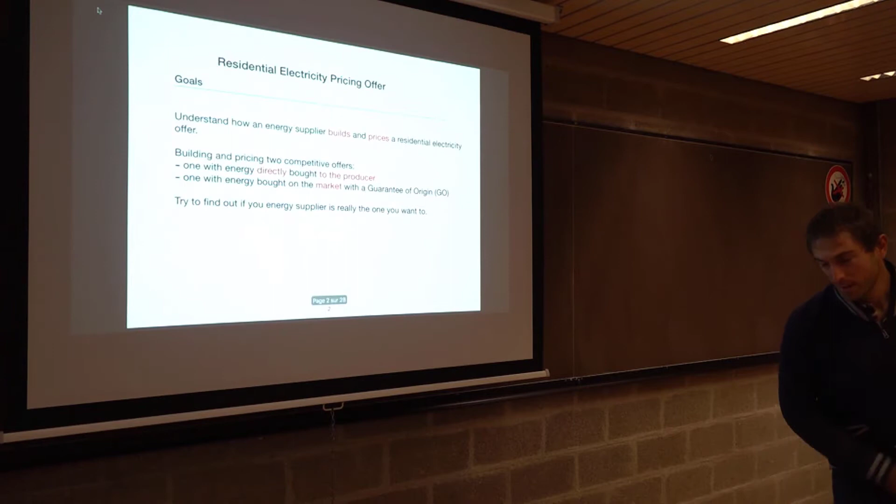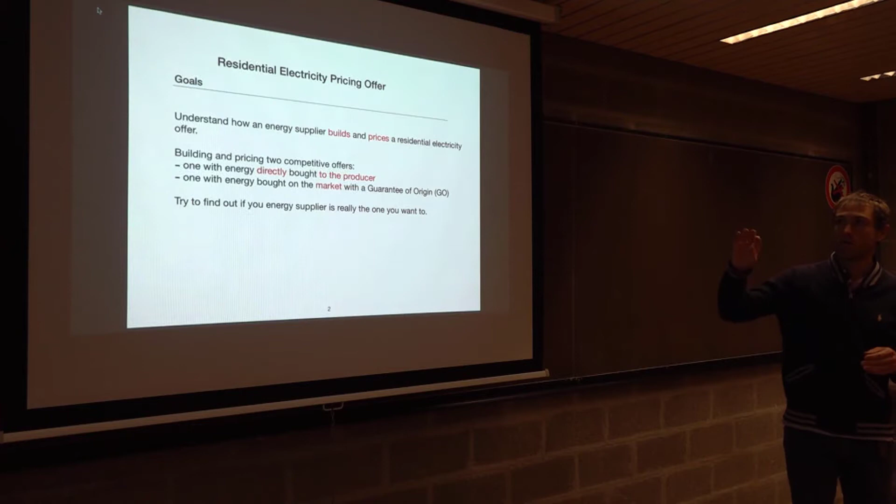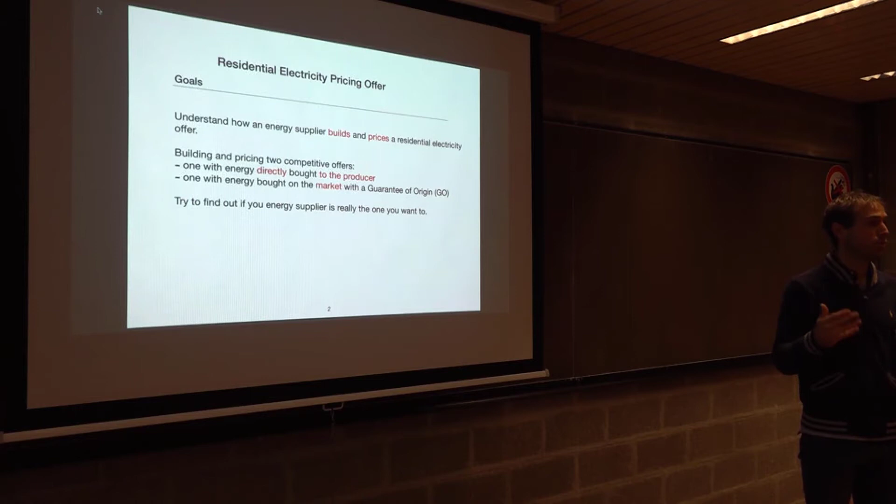So the goal of this part now is to understand how an energy supplier builds and prices a residential electricity offer. We will look at two ways of doing that. The first way is to buy the energy directly from the producer, and the second way is to buy the energy on the market with a guarantee of origin. These are two different ways of building an energy offer, but also two different ways of pricing it.

Remember, we have the producer. They produce electricity or gas. It goes to the grid, so you have the TSO and DSO. They transport and distribute the energy to our houses. And then, as a residential consumer, we can consume the electricity and the gas.

So when I have my electricity bill or my gas bill, I pay around 20% or 30% of the price just for the energy. The other 70% is for taxes, distribution and transportation. So I am not talking about taxes, distribution and transportation. I am only focusing on the energy part, that 20% to 30% of the electricity or gas bill.

So for this energy part, what do you have inside of it? Inside that 20%, you have of course energy, but also what is named balancing fees, the guarantee of origin, and also a thing that is named capacity. We'll talk about that at the end.

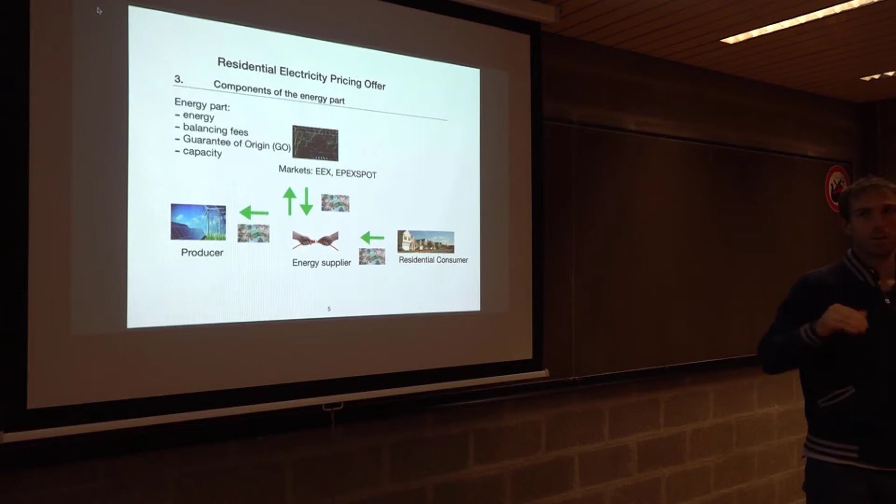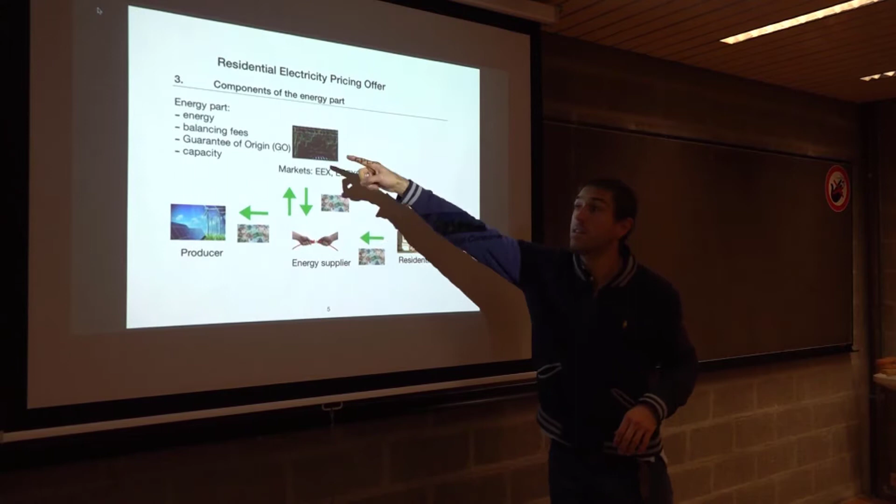So, I am an energy supplier. I can buy the energy on the market, or I can buy it directly from the producer. Imagine I mix it, and then I can sell my energy to the residential consumer. As an energy supplier, I will have to pay for the energy part, because I have to pay for the energy I am buying. But I will also have some balancing fee. If I want to make a green offer, I need to buy guarantee of origin. And I have also something to pay that is named capacity. So we will see each part of it.

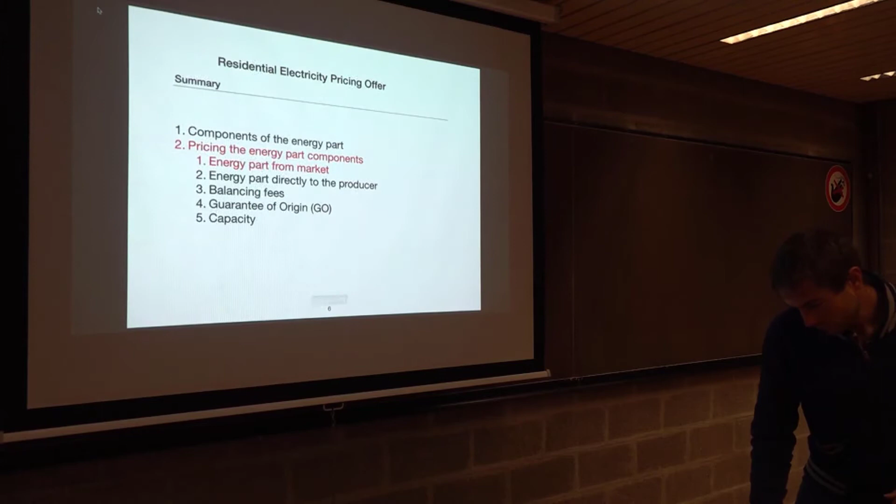So imagine that we are in a situation where we buy the energy on the market. I am focusing on the energy markets. You have different products on this energy market: calendars, quarters, months, weeks, days products. So you can buy electricity or gas in advance. For instance, 3 years before you will deliver electricity, you can buy it.

So in 3 years, you will deliver electricity in 3 years, but you can buy it 3 years before. Or a quarter before, or a month before, or a week before, or a day before. And then you can buy electricity or gas on a day-ahead basis. So for instance, we are here this morning, and tomorrow I have my consumer that will consume energy, and I would like to buy some energy for them.

So I can go to the day-ahead market, also named sometimes the spot market. Now imagine we are today, and my consumer is consuming energy in 2 hours, in 3 hours. I can also go to the intraday market and buy energy just 1 hour before, or 15 minutes before. So you have a lot of possibilities.

If you want to go to the market, you can buy energy from 3 years before up to 15 minutes before delivery. And you have several different products, and you can mix everything, do whatever you want, optimize, and at the end you have a fixed price. So this is what we will see.

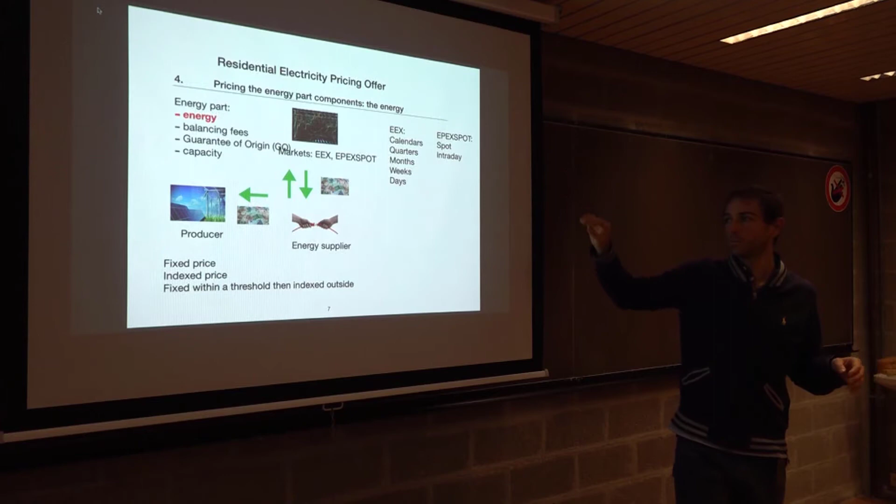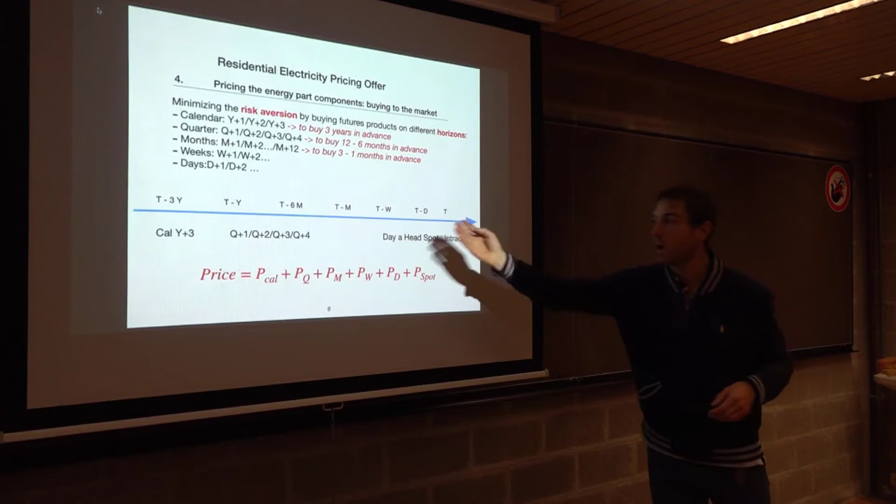So the resulting price of the energy offer will be a kind of mix of everything, because you can buy calendar, quarter, month, week, day, spot, and intraday, but imagine you have to deliver 10 megawatts of electricity for a given day.

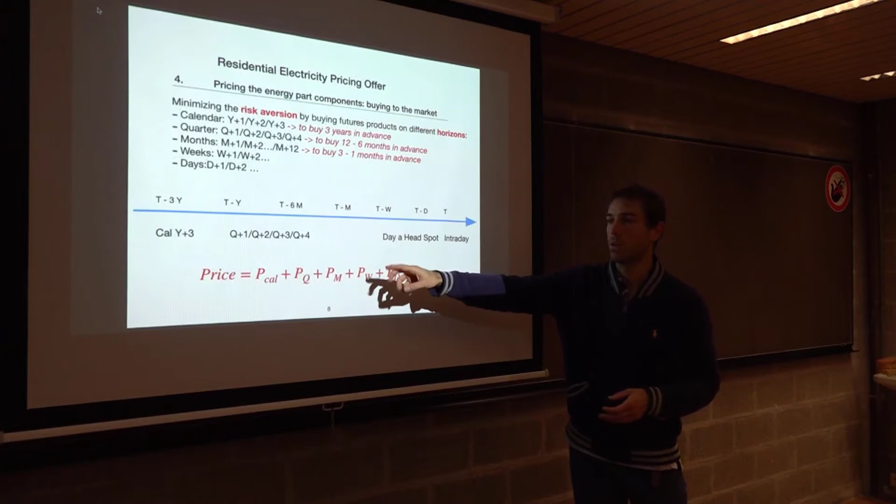You can buy 1 megawatt 3 years in advance, 1 megawatt 2 months in advance, 5 megawatts 3 weeks in advance, 1 megawatt 1 day in advance, and the last megawatt just the day before. The resulting price will be a kind of average of the different prices, because the price when you buy a calendar product is not necessarily the same as the month product, the weekly product, the day product, or the spot day-ahead product.

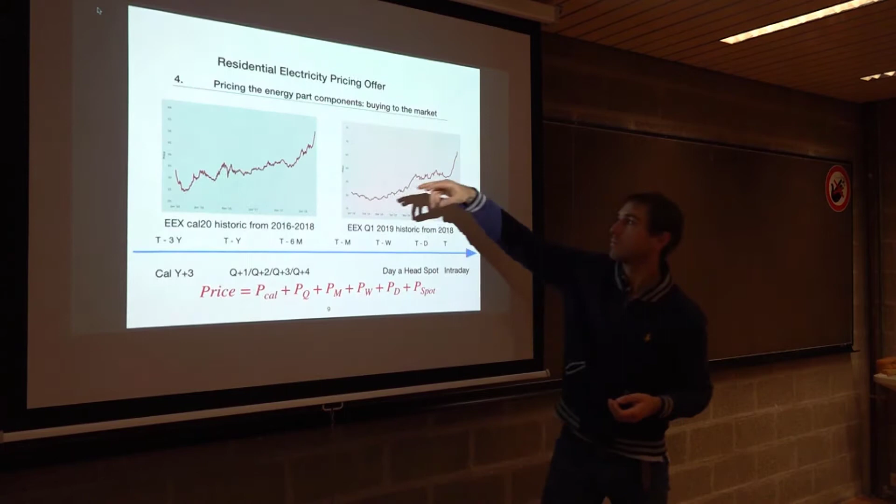And you see that its price is fluctuating—it's offer and demand. So for each product, calendar, quarter, month, weekly, day, it is fluctuating. It means that if you want to buy energy 3 years before, maybe one day it will be a given price, and the day after it will be another price. So you have to compose with that. When you are an energy supplier and want to buy energy in advance, you have to take into account that the prices of each product are fluctuating.

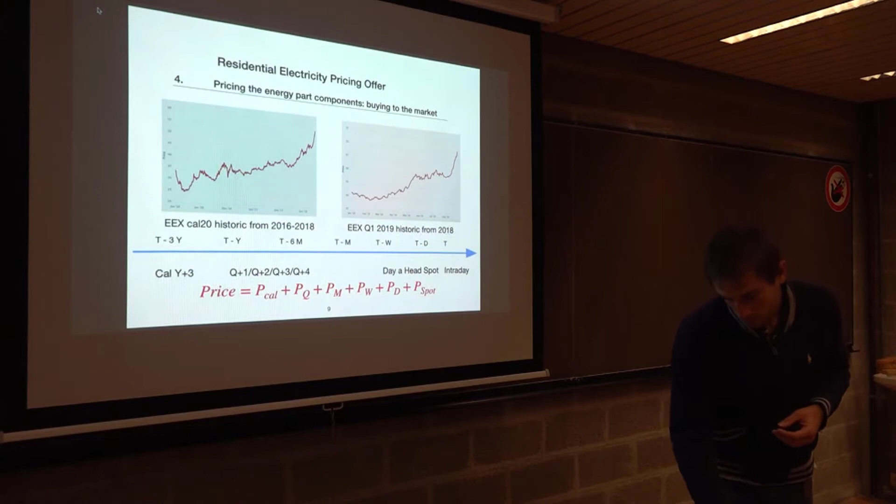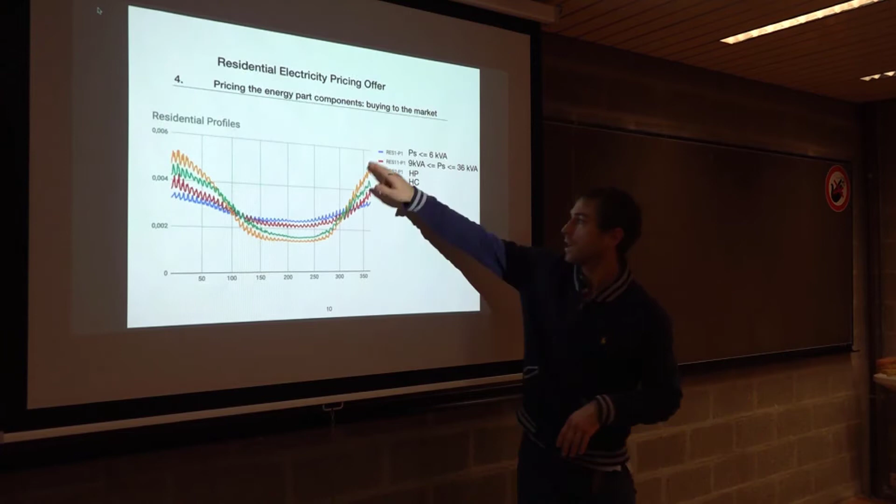So now, how can we do that? Imagine you have your consumers—you have several types of profiles, called residential profiles. Some profiles of consumers, here in winter and here in summer, consume much more during winter than other kinds of people.

For instance, these are big houses—big houses you have to heat a lot. In comparison, apartments, which are smaller and closer to each other, don't need as much heat. Most of the time during winter they need less heat.

So you have different kinds of residential profiles, and you try to identify among all your consumers which class of residential profile they belong to. Imagine you have thousands of residential consumers, and you say this one belongs to this class, these two to this class, and so on. So you have several theoretical classes, and you try to stick with them.

Then you have a look at the residential profile and say, okay, now I need to buy the energy so they can consume this amount during winter, this amount during summer. This is how an energy supplier will build and buy the energy.

He will look at all his consumers, identify the class, and say, I have 1,000 of this class, 2,000 of this class, 3,000 of this class. I know this class consumes like this—it's an estimation, of course, but a quite good one. And now I can buy the amount of energy for each class, given the number of customers by class.

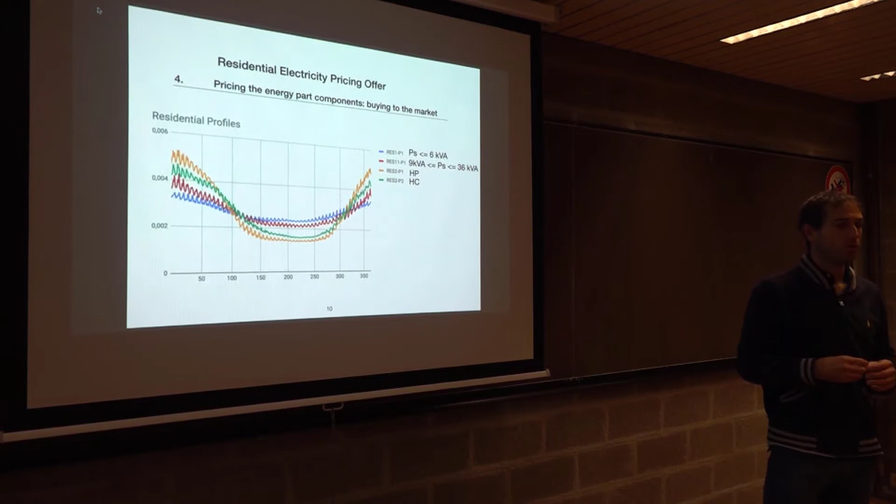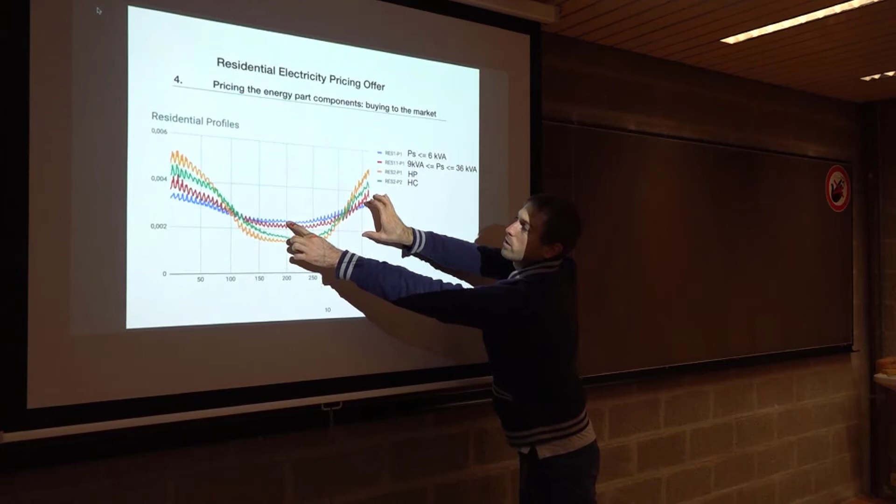So the blue one is for a small consumer, which most of the time are people that have a small apartment. So they don't need a lot of heat. Most of the time they use a lot of energy just for lighting, smartphone, whatever, and a little bit for heating, but not that much. So that's why during winter you don't see a lot of difference between summer and winter. So let's focus on the blue profile one, and the methodology is the same for every profile.

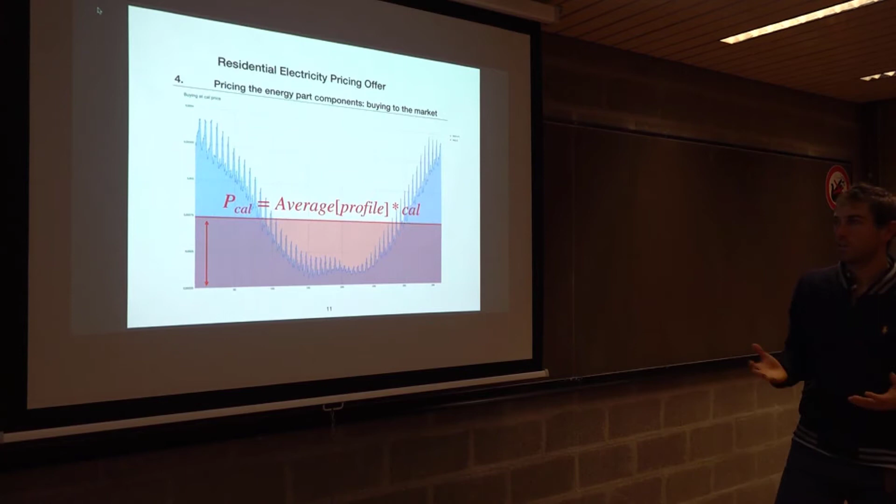So one way of doing it as an energy supplier is to say, okay, I have this profile. So let's say I have 10,000 consumers that have the same profile. Now I need to buy energy for them. Because if I don't buy energy, I will have a fine. So I will try to buy a part of the energy a year before.

So I will try to buy a calendar product. But when you buy a calendar product, so two years before, you buy energy, it is a constant amount of energy that you will have for one year. So you go to the market and say I want one calendar product, and the market says okay, no problem. So you buy it, and then you will have a constant amount of energy for one year. So for instance, one megawatt.

You will have one megawatt each hour for one year. If you buy a calendar product, it is one megawatt each hour for one year. If you buy two calendars, you will have two megawatts per hour, each hour of the year. It's like that.

So let's say I'd like to know how much of this calendar product I would like to buy. You look at the profile and one way of doing it is just to take the average. I make the average of my profile over the year, and I have this line. This is the average, and you say, okay, this is the amount of calendar product that I would like to buy. Because I took the average, you go to the market and say, okay, I want this amount of calendar product. So it means that imagine now you just stop and don't buy anything else.

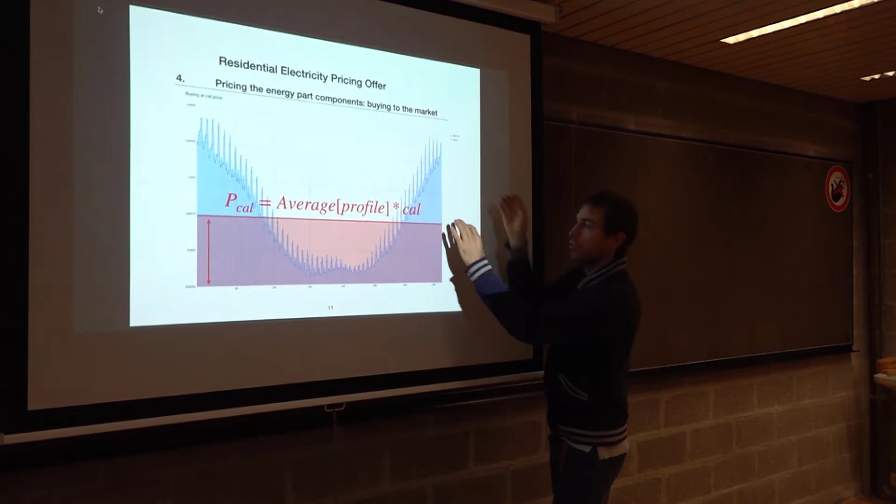So then the year passes, and then you go to the year of delivery. So you will have enough energy there, but during winter you will lack this amount of energy, and during summer you will have too much energy. But you cover this amount of energy.

Okay, so you have two years in advance, you do that. So now what can you do? It is to buy this amount of additional energy, and maybe to sell this part.

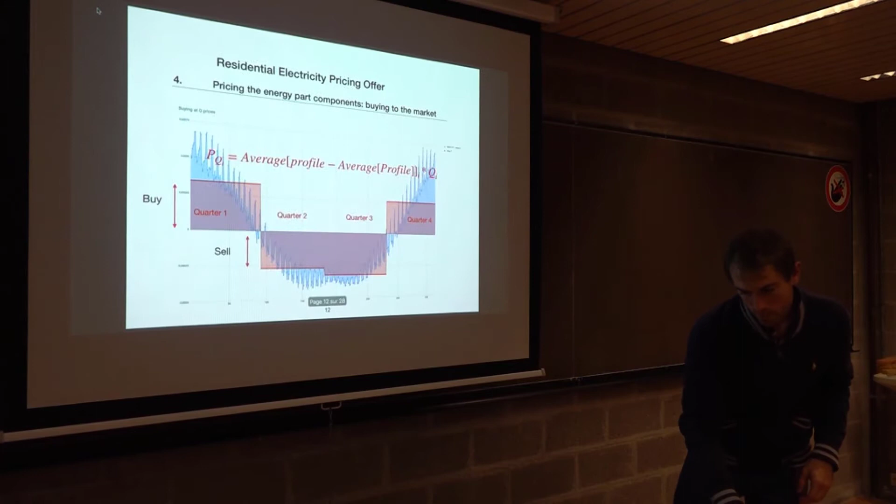So what you can do is to buy a quarter product. The quarter product follows the same logic as the calendar product. If you buy, for example, the quarter one product, you will have one megawatt each hour of the first quarter of the year. If you buy the quarter four, you will have one megawatt each hour of the fourth quarter of the year.

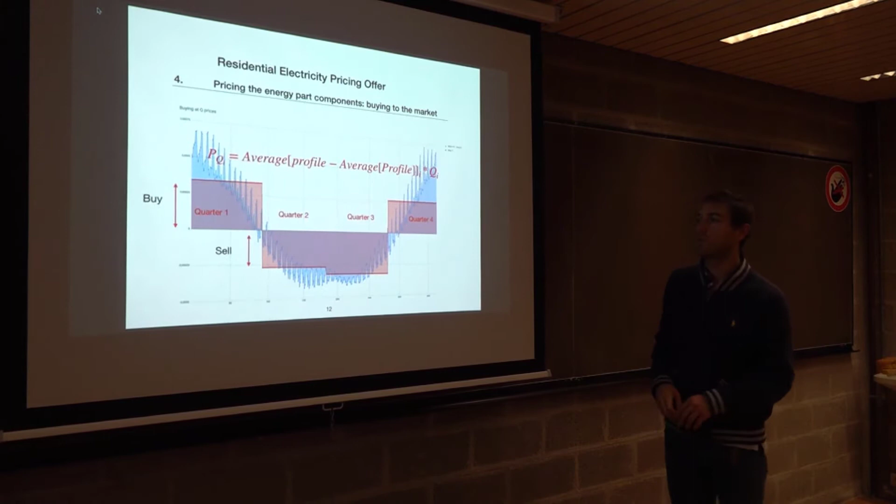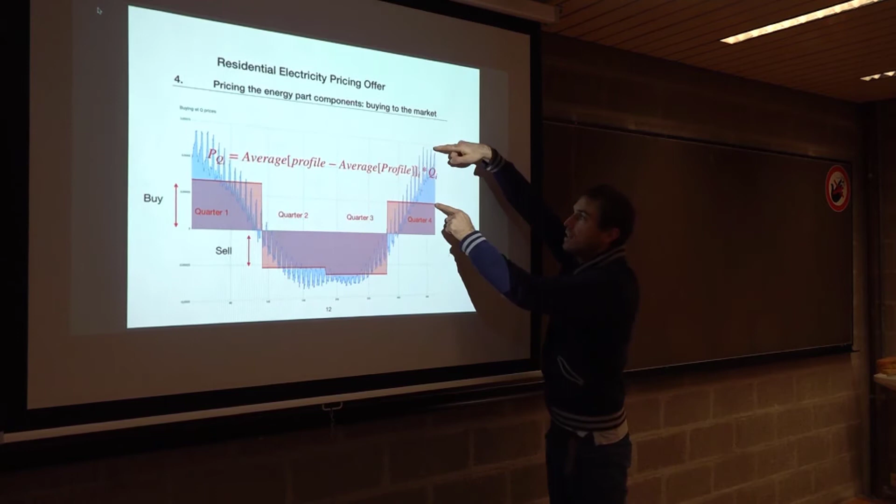So what you can do, imagine you already bought this calendar, so you need to buy energy there and to sell it there. You go to buy some quarters and try to buy this additional energy, and sell this part. You sell this part of the calendar product for quarter 2 and quarter 3, but you buy energy for quarter 4 and quarter 1. And here you see that you still lack this part of energy, but here now you have enough, here a little bit too much, here you're okay, and here you lack this part.

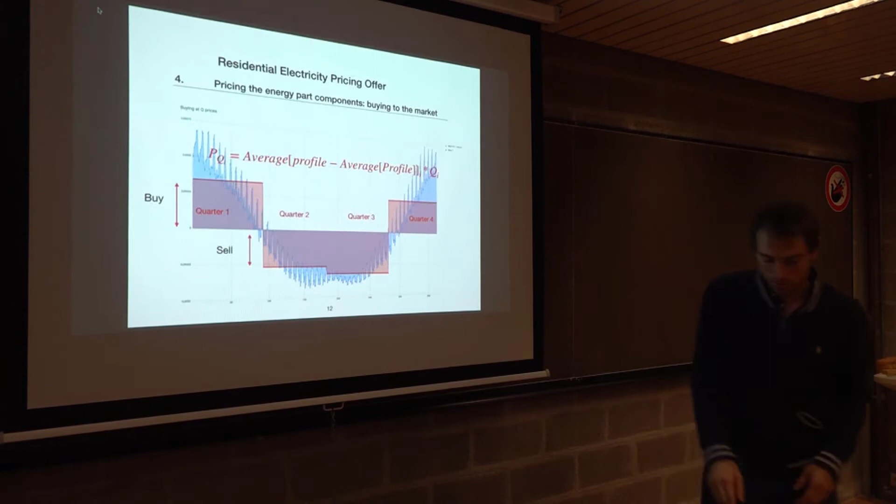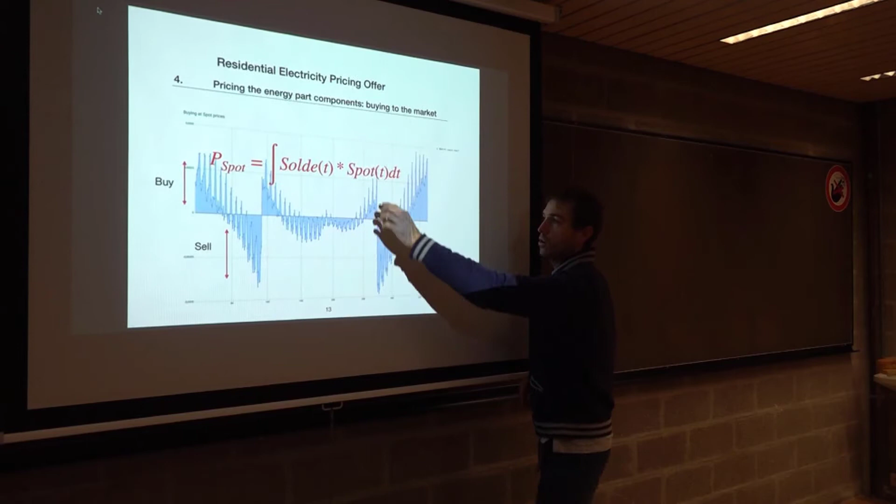Okay, so what you can do now is go to the spot market and say, okay, here I lack this part, I buy energy each day for this part, and here I have too much, so I sell it. I buy, I sell, and so on and so on.

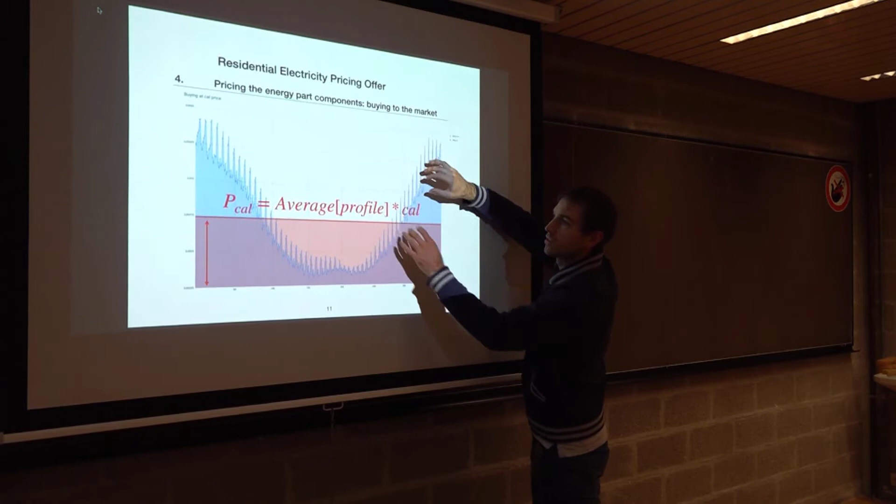So when you go to the market, and we come back to this, you look at your profile, and the idea is to try to rebuild the consumption profile by using energy products. This is a way of doing it, in fact. This is a consumption profile, and you are trying to add some products. It's like Tetris. You are trying to buy some products to match the consumption profile to some product profile from the market.

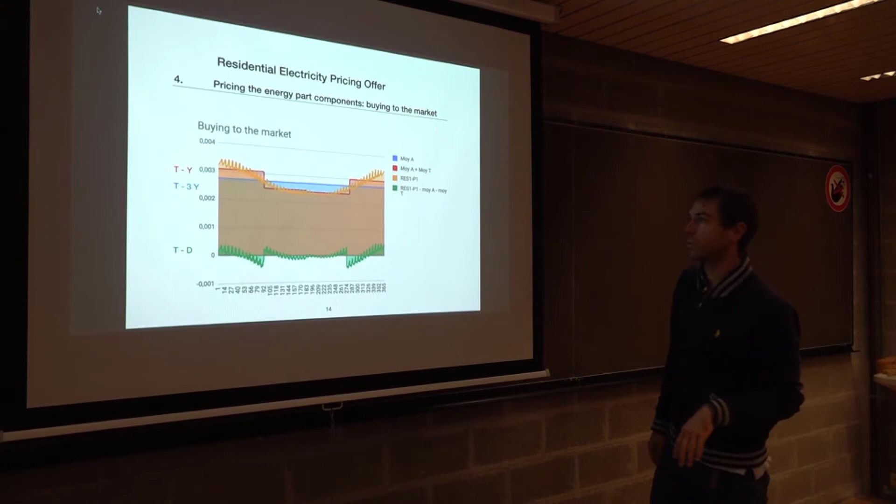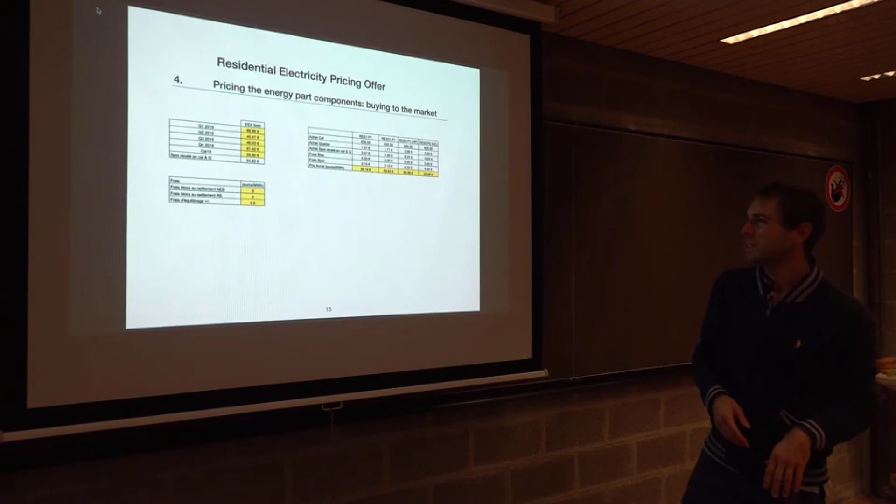And so at the end, this is what we are trying to do by buying product, and you can do it for each residential profile. Maybe you cannot see the numbers, so I don't know if I can zoom.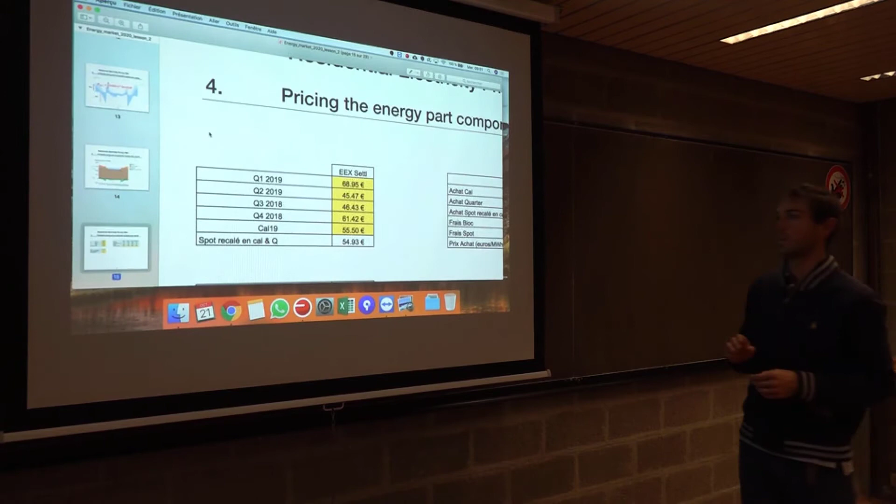I will try, maybe like that. So for instance, it is an example where I apply this strategy, for a given profile, for the year 2019. I buy some calendar 19 product - that was the price of this calendar product. Then I try to buy different quarter products, and you see that they have different prices. Most of the time, the first quarter and the last quarter of the year have much higher prices, because during winter the energy is most of the time more expensive than during summer, because we need more energy in winter in northern European countries, since we have to heat.

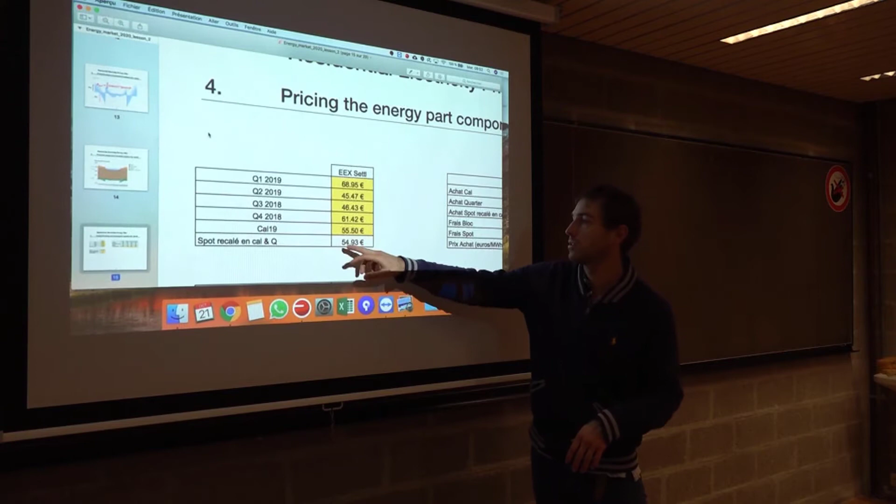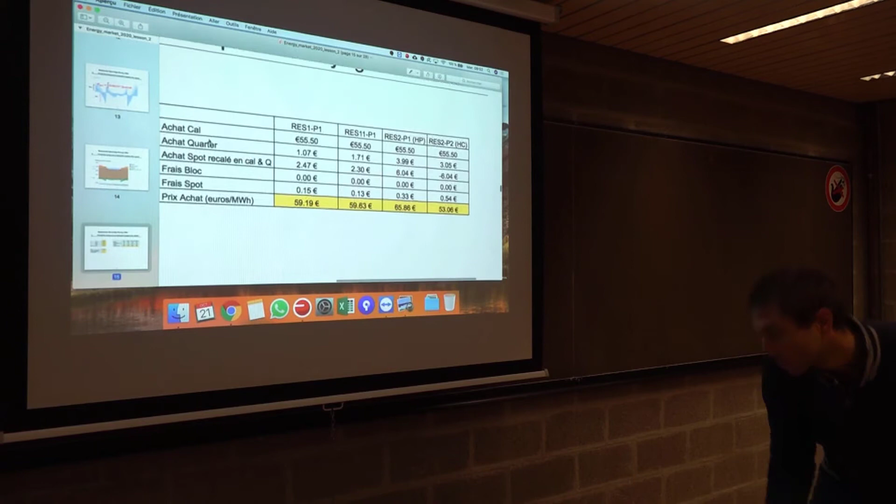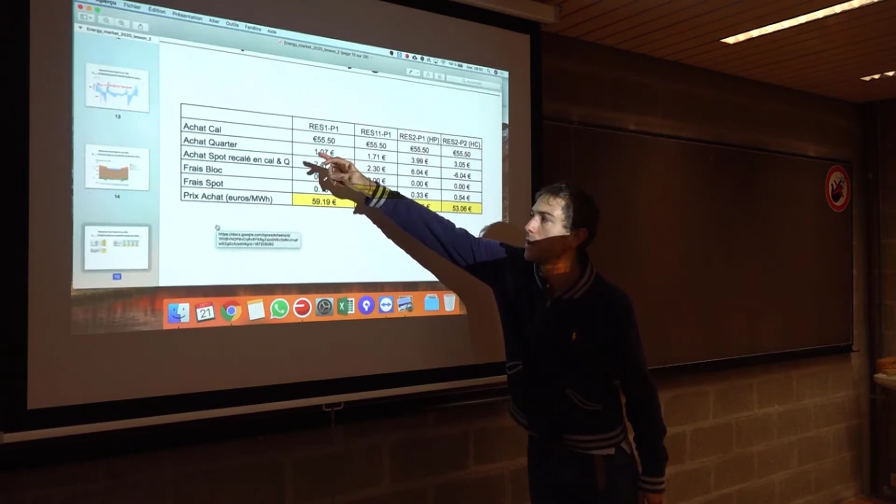And then I buy some difference on the spot. And now here are the different profiles - there are 4 different profiles of consumption. I buy some energy calendar for each profile, then quarter, then spot, and these are some fees, but we don't care. And you see that at the end I have different prices per energy profile that are a mix of the calendar, quarter, and spot profile.

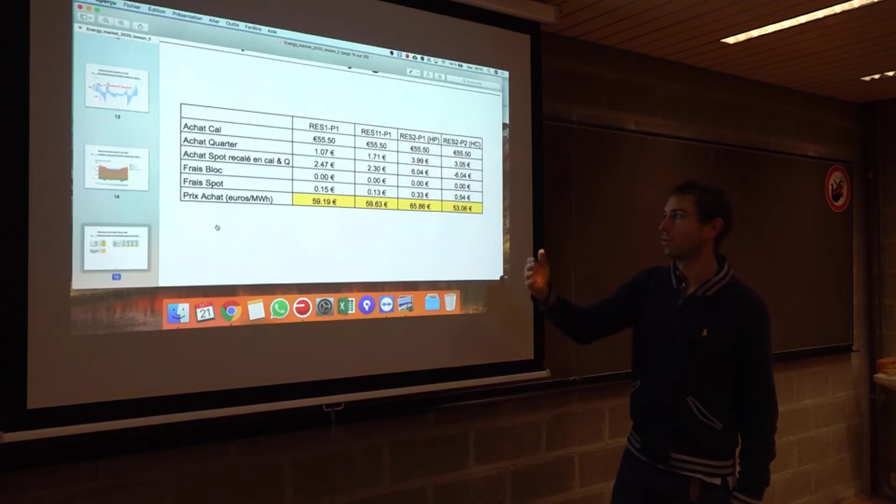And these profiles, this one and this one, are residential profiles that consume more - this is why the resulting price here is higher than these two. But just to say, if you have to remember one thing: you have an energy supplier, you have different consumption profiles, and you try, when you go to the market, to match the consumption profile to a financial profile to supply them, and you try to buy the energy at the best price to match the consumption profile.

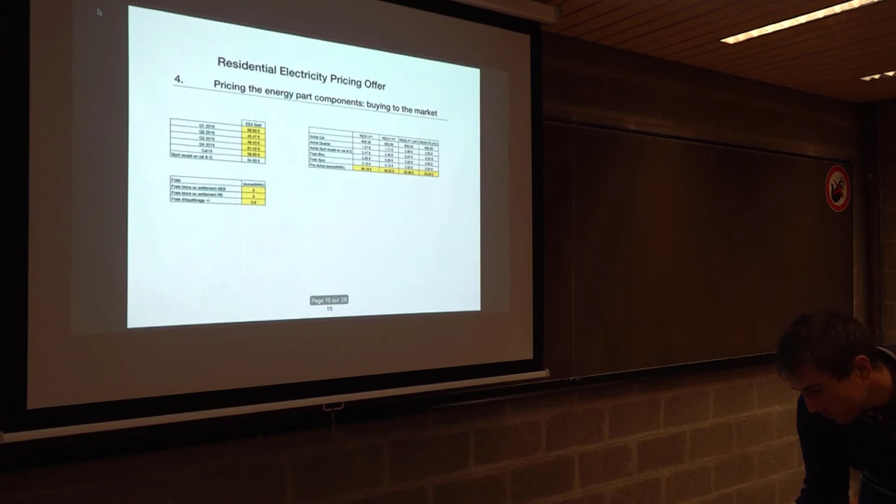Do you have any question about this part?

I didn't tell anything about guarantee of origin here. I am just talking about the energy part, how to price the energy part. Then we'll talk about guarantee of origin later.

So you go to the market and you have several products from calendar to day ahead and intraday, and you try to buy in advance to match the consumption profile, and you try to buy at the best price. So maybe someday you will not buy because the prices are too high, and you say, okay, I will wait for 1 week because I know that in 1 week maybe a nuclear power plant will come back to the grid, so the price will decrease, and so on. So it is a kind of optimization strategy to try to buy different financial products at the best price to make the best final price for your consumer.

But at the end you have a fixed price, that is in fact a kind of mix of every financial product that you bought.

Now if you go directly to the producer - so we talked about how to price an energy offer if you buy it on the market. But now if you go directly to the producer and bypass the market, it's a little bit easier to do, because for instance here it is a wind farm, so in blue it is the wind during the year. You can see that it's kind of a random production, but it's like that, the wind farm. And here in red you have the spot price of the day-ahead market.

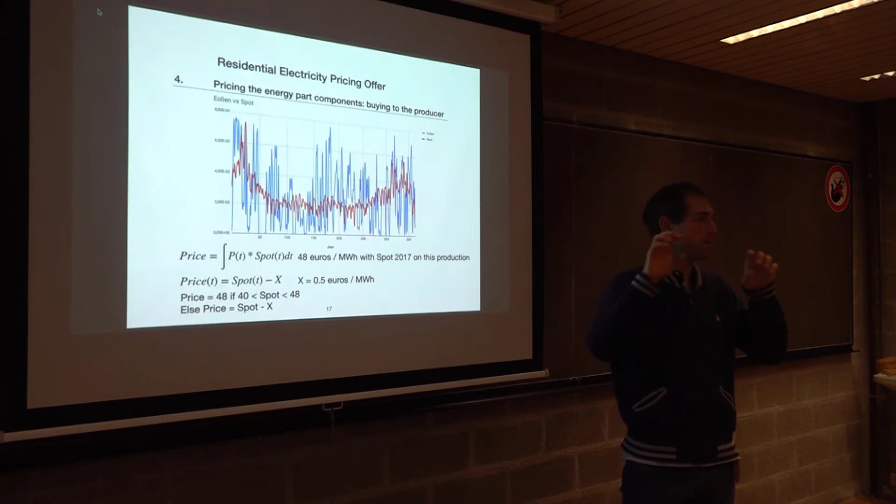So I don't know it because it will be next year, but you say, okay, I buy all your production at the spot price. So what will be the resulting price? It will be a kind of sum for each hour of the next year of the productions times the spot price. But at the end, over a year, it will provide you a fixed price. So for instance, 48 euro per megawatt hour, here with the spot price of 2017 for this production. It is something like that.

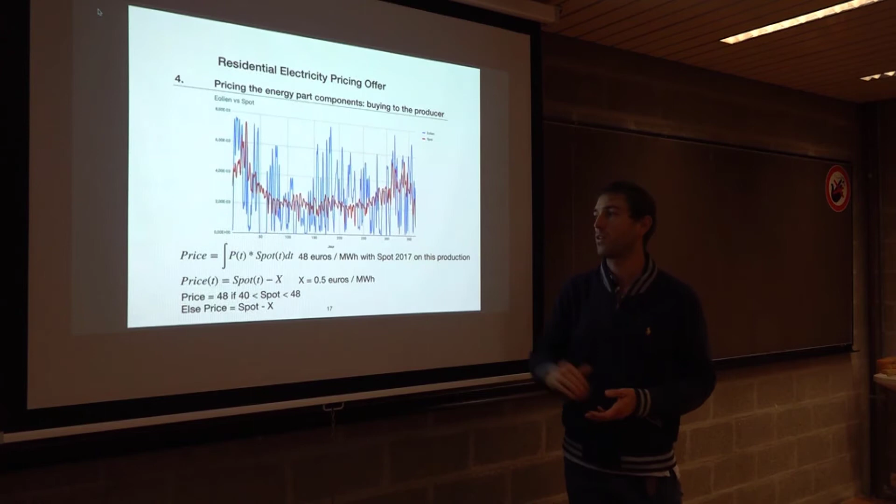So this is one way of doing that, and you bypass completely the market. Or you can say to the producer, okay, I can guarantee you a price, because he could tell, yes, but if the market is too low, it's not good for me. So you can say, okay, if the spot price is too much fluctuating, I can guarantee you a fixed price, 48, even if the spot is between 40 and 48. I don't care. So then it is a negotiation with the producer to set up a price.

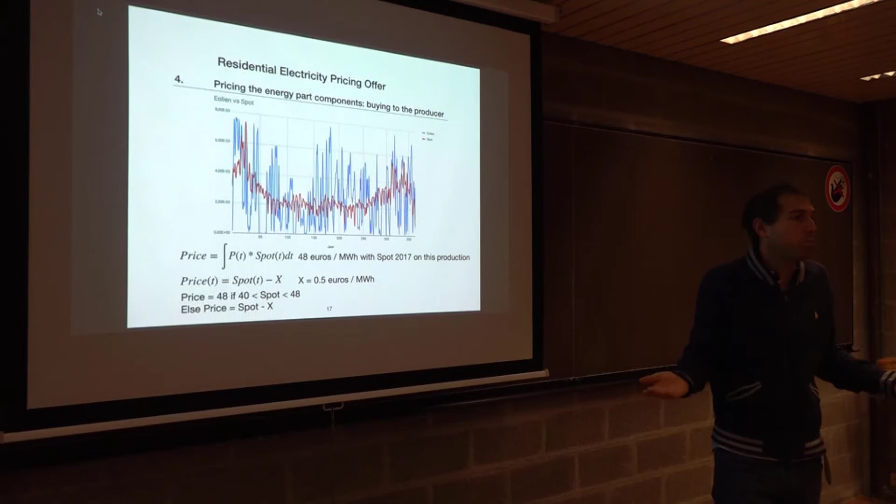But it's much more easier than going to the market, because in the market you have several products that you are trying to optimize. Here you just have the producer, you say, okay, I buy your production and we have to match a price. That's all.

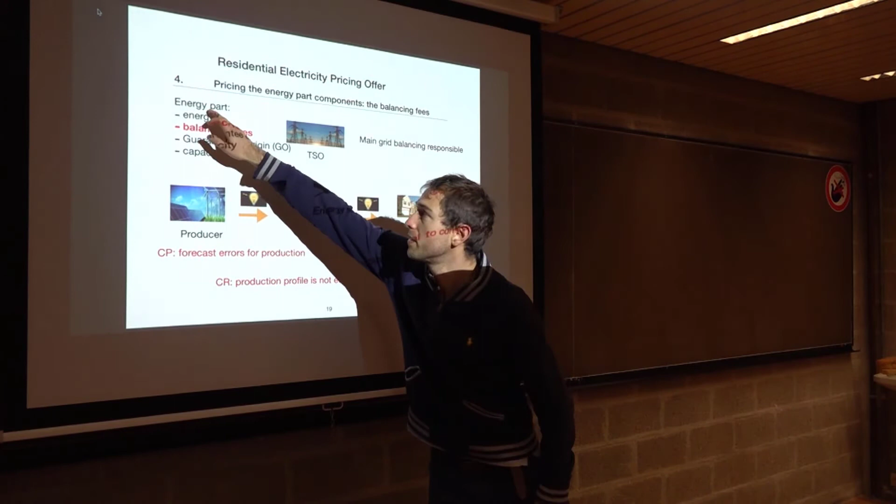Okay. So we talk about the energy part, how to price the energy part, so if you go to the market or if you go directly to the producer. Now we have the balancing fees. So we talk about the energy part, now we are talking about the balancing fees. What are the balancing fees?

It is related to the fact that an energy supplier is a balancing responsible party. So the energy supplier buys energy on the market or to a producer to supply consumers. And he is a balancing responsible party. It means that he has to supply its consumers. You could say, okay, of course, I have a contract with him, so he has to supply me. Yes, he has to supply you.

But it's not easy, because he doesn't know in advance what you will consume the next day, or in 1 month, or in 1 year. So he will make errors. He will try in advance to estimate and to forecast your consumption. Of course, he will try to buy in advance the right amount of energy, but he is not an oracle, so he will make errors. So the day will arrive, and there will be some error between the amount of energy the energy supplier bought on the market or to the producer, and the reality of the consumer that consumes the amount of energy.

So the TSO will say, there are some errors. You, energy supplier, you bought this amount of energy, you deliver this amount of energy, but your consumers, they consume more or less, depends, more or less. So they will have to pay for that. This is what we name balancing fees. So the balancing cost to try to match the consumption and the production.

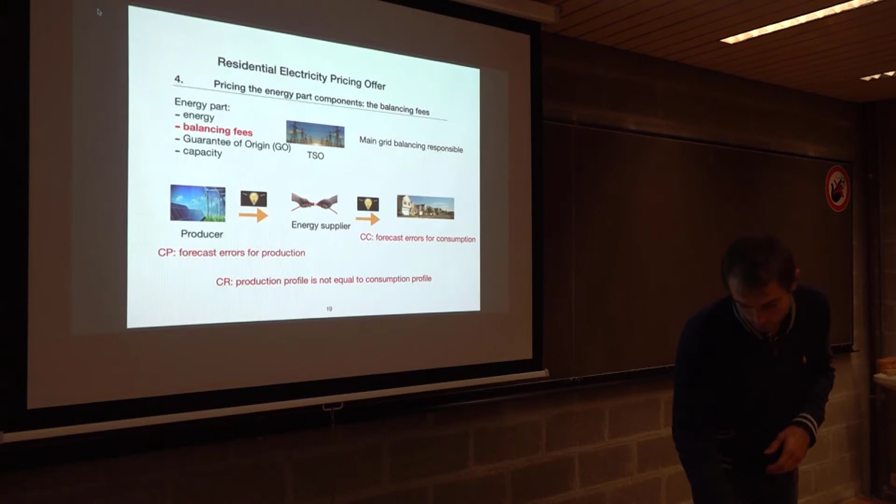So how can you estimate this cost? One way of doing it is you take the consumption, you take the production, you make the difference, and you can estimate that I will try to buy and sell the excess energy to the spot market, for instance, and to buy what I lack of energy from the spot market. So you can estimate this cost like this.

You make the difference, you multiply by the spot price, you integrate over an entire year until it provides you a fixed cost. So here I have done that for a wind farm and a residential profile, and it

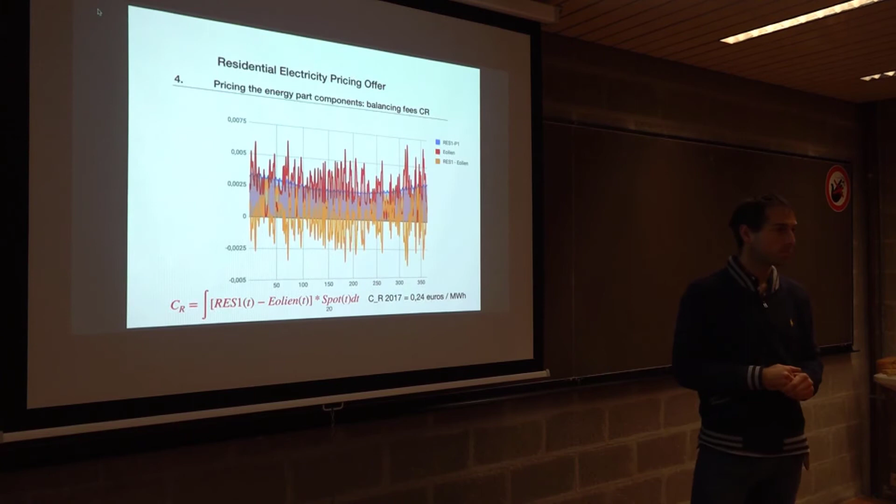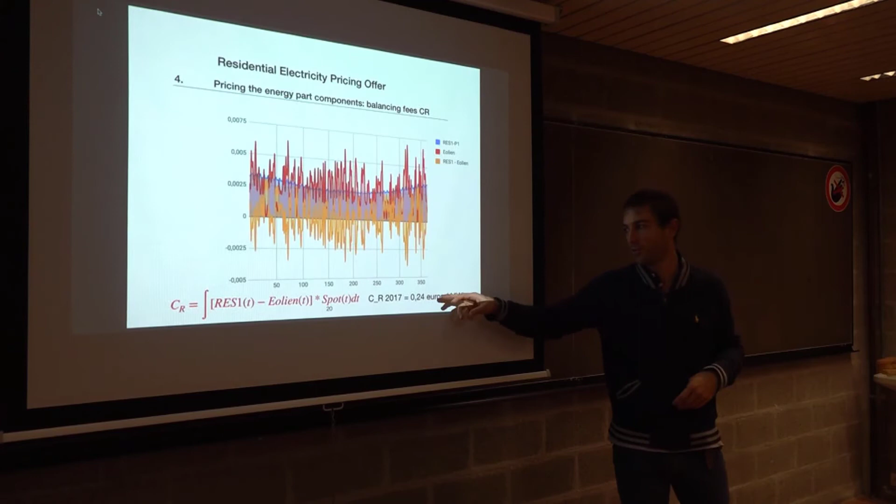is 0.24 euro per megawatt hour. So I know for these profiles of wind farm and consumption profile that it will cost me this additional cost to match production and consumption. So when I will bid, I will try to price my energy offer, I will take that into account and I will add it to the energy part. Because if I don't add it, I will lose money. So this is the cost.

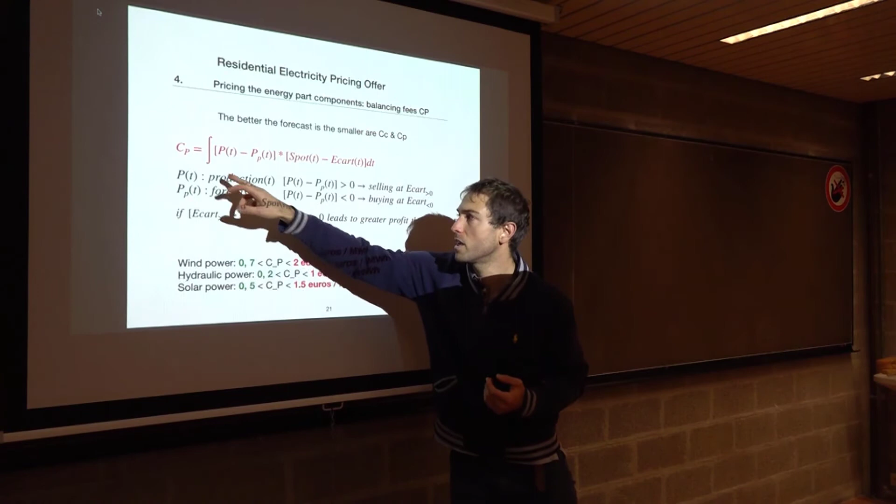Then you have the balancing fee for the error of forecast for production. It's the same principle. So you try to forecast the production. This is the forecast of production, PP, and here you have the true realization of the production.

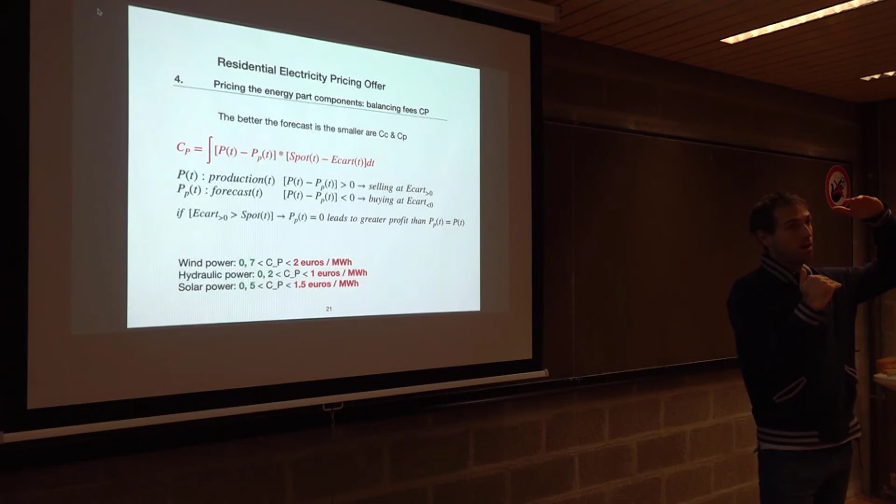One way of assessing this price is to say, if I have too much production... I try to forecast the production for next day, for instance. I make a forecast, PP. But in reality, I will have a production, and sometimes I will have a forecast that is higher than the true realization, and some other time I will have a forecast that is lower than the true realization. So for the hours where the forecast is higher than the realization, I will have, in fact, less energy than expected, because I forecasted this amount of energy, but in reality I have this amount of energy.

So it means that I sell this part, because I forecast this part. So it means that I need to buy this amount of energy from the market.

And on the opposite, if I forecast this part, but in reality I have this amount of energy, I am lucky, in fact, because I have more energy than expected. But I am not so lucky, in fact, because I have too much energy. And I don't know what to do with this energy, because my consumers, they need this part. So I am like, okay, I have too much energy, but what do I do with this energy? So I need to sell this energy.

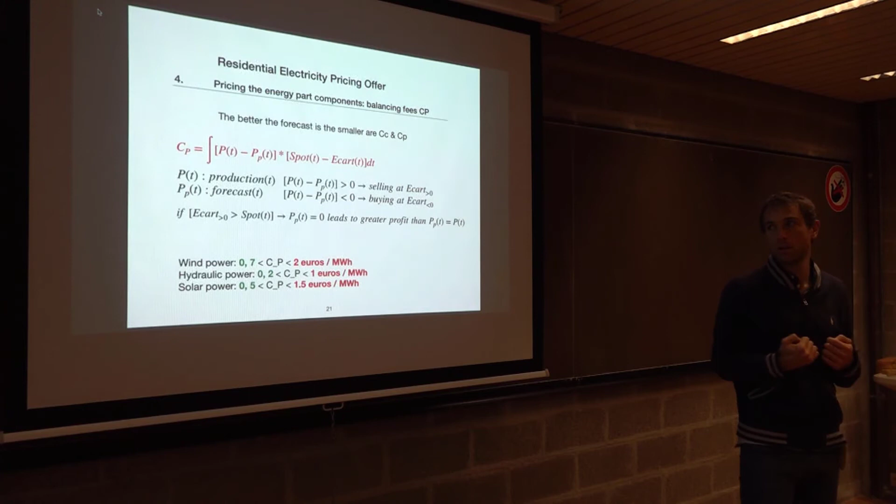At some time, it will cost me to sell this energy. So you can estimate that by taking the spot price and the imbalance price. And with this formula, you can estimate this forecast error cost.

And so for wind power, hydraulic power, solar power, you don't have the same cost, because it is not the same to predict wind power than hydraulic power or solar power. It is much more easy to forecast hydraulic production of a river, for instance, than wind power or solar power. Solar power has a bell curve like that, and sometimes you have some clouds, so it's not perfectly a bell curve, but most of the time it has the same curve.

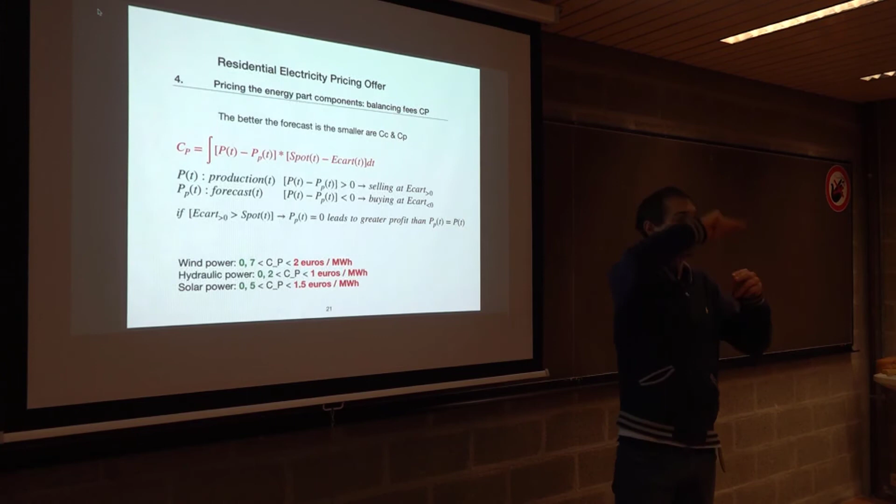Wind is much more random. So this is why wind power has the highest forecast error cost, because it is very difficult to forecast wind production. So you will make more errors, and most of the time you will have to compensate for this error and pay for it. So these are some costs.

And so they are between, for instance, for wind, between 0.7 and 2 euro per megawatt hour. And for hydraulic, this amount and this amount. So these are some costs that, as an energy supplier, I have to take into account when I price my energy offer.

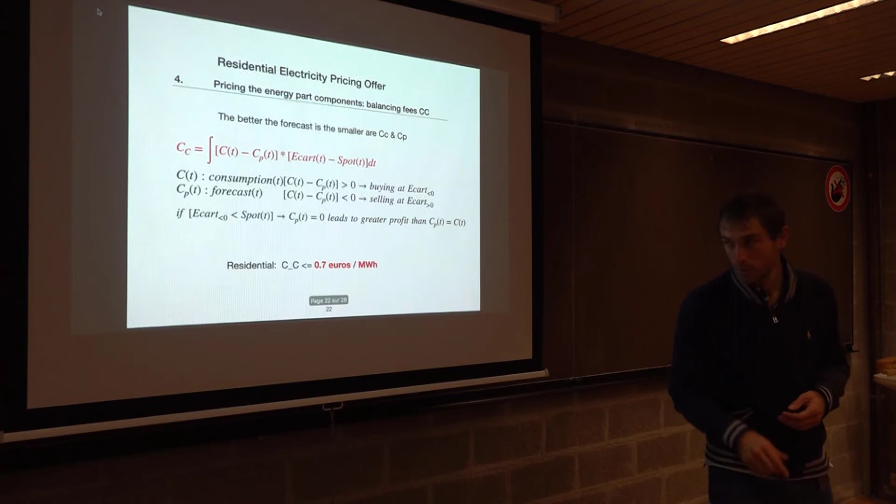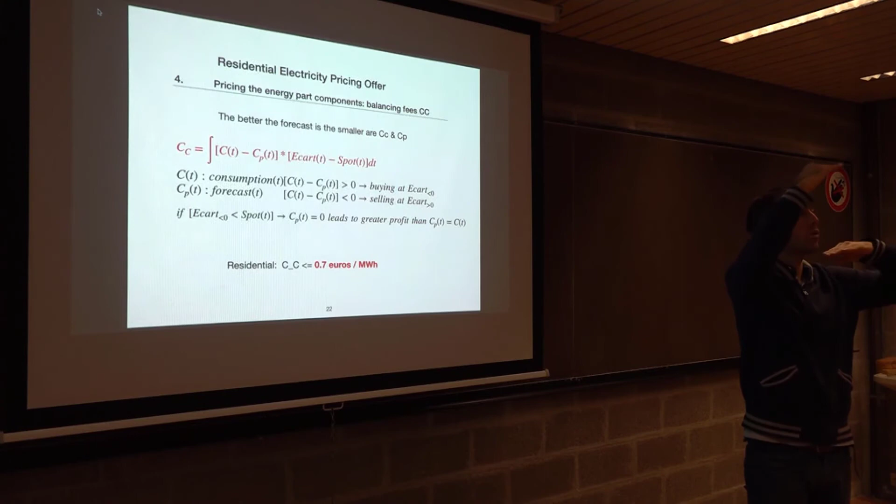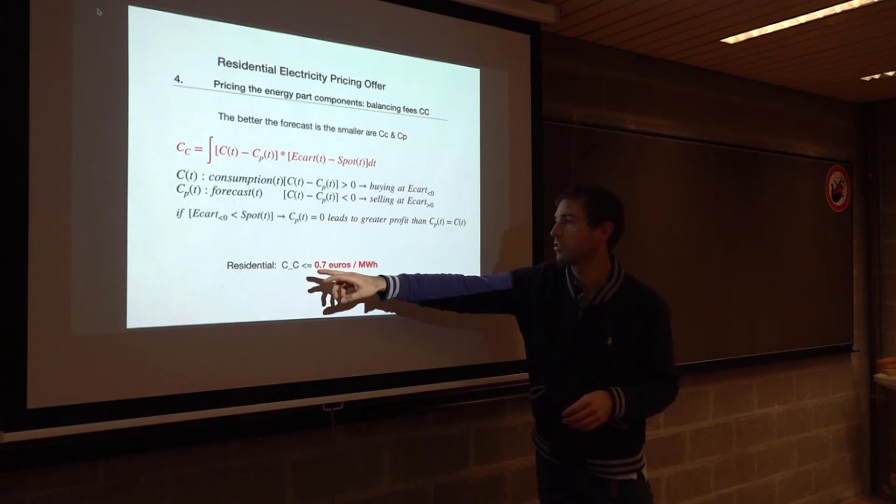And so the last one is the forecast error for consumption. I have my consumption profile, but it's theoretical. In reality, the consumption is a little bit different. It's the same principle: I try to forecast my consumption, but in reality maybe I will have this consumption, or I will have that consumption. So I will have to compensate for this forecast error, and I will have to pay for it, and so I will have a cost. Most of the time, we can estimate that the cost for a residential consumption is 0.7 euro per megawatt hour.

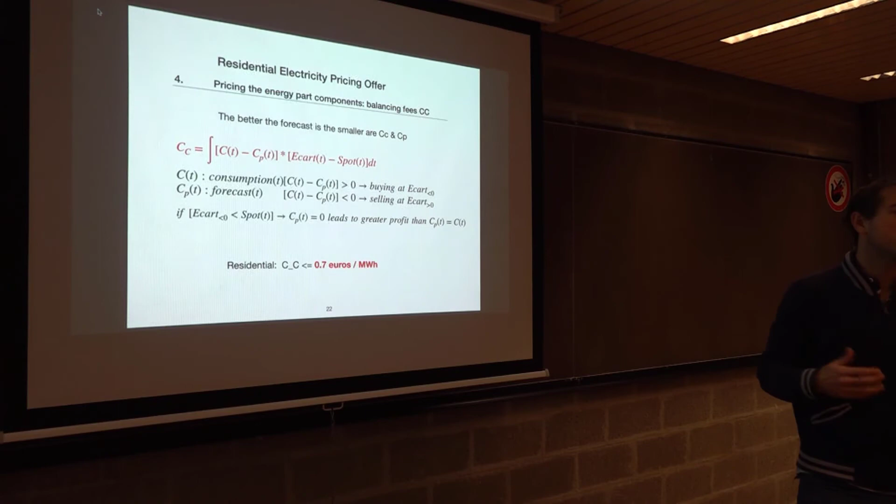In fact, you don't care about the formula, just bear in mind that you have to make forecasts for production and consumption, and at the end your forecast is not perfect, and you will have to pay for the difference between reality and the forecast. But the better your forecast, the smaller your costs. So an energy supplier can optimize its revenue by making the best, most accurate forecast possible. But in reality, it's difficult to do that.

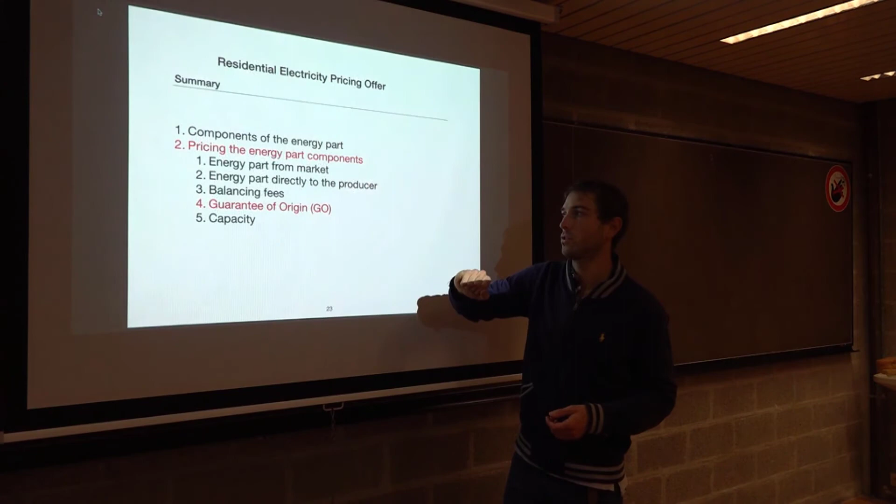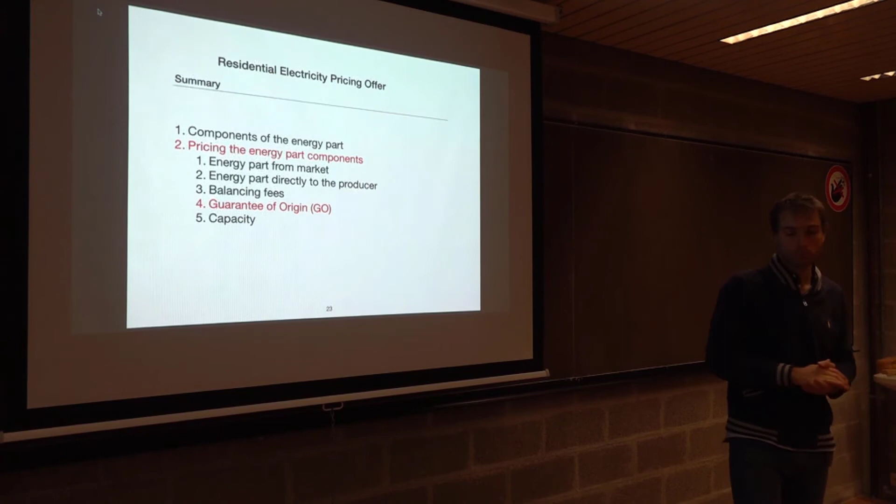So we have seen how to price the energy part for the market, or the energy part if we go directly to a producer. We have seen that we also have balancing fees that add up to the energy part. And now we have the famous guarantee of origin. So if I would like to make a green offer, I need to buy the guarantee of origin. I already paid for the energy part, I already paid for the balancing fees, now I buy the guarantee of origin.

So to have some figures: when you buy energy on the market, on average it will be 45 euro per megawatt hour. With 45 euro per megawatt hour, okay, you have your energy. Then the balancing fee, you've seen it's like 2 or 3 euros. So you have 45 euro per megawatt hour, then you add 2 or 3 euro per megawatt hour for the balancing fee. So you see it's about 10% of the energy.

And now we have the guarantee of origin, and most of the time the price of a guarantee of origin is like between 0.5 and 2 euro per megawatt. So 45, plus 2 or 3 for balancing fee, and maybe 1 or 2 for the guarantee of origin.

So you can see that the guarantee of origin is not so expensive in comparison with the energy part, in fact. And it can be a little bit strange, because if this guarantee of origin is supposed to help financially some wind farm, PV farm, or hydraulic power plant, you could have thought that the price would be much higher. Imagine you are a wind producer, you sell your energy maybe for 45 euro per megawatt hour, so you make 45 euro per megawatt hour, and then you can also sell the guarantee of origin for 1 euro. So okay, you take it because it's 46 now, 45 plus 1, but at the end it's just 1 plus 45, so it's not a lot of money for this guarantee of origin.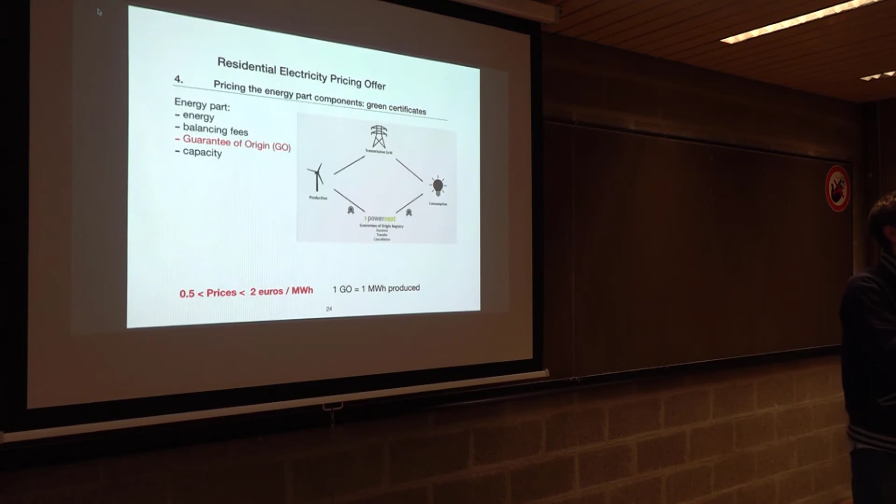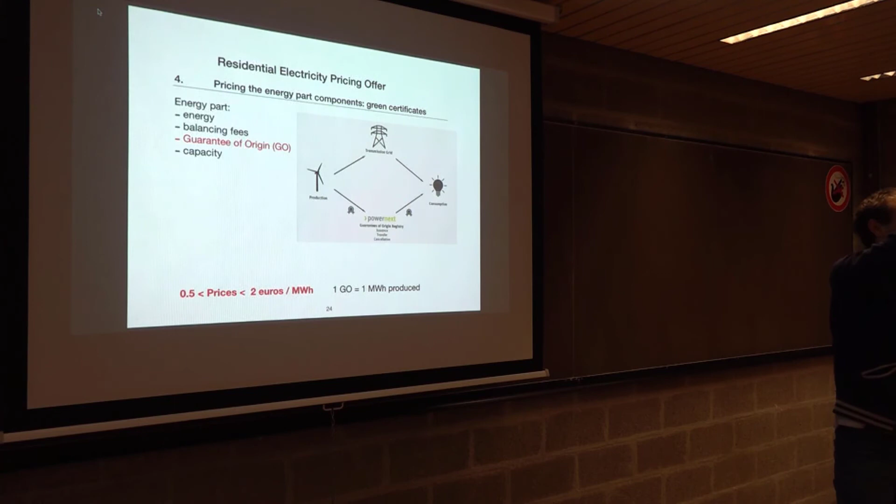And if you have a look at your electricity bill, most of the time in Belgium we pay around 25 cents per kilowatt hour, which is 250 euro per megawatt hour. So 50 euro per megawatt hour is the energy part, and 250 euro per megawatt hour is what you actually pay. So you see that the energy part is not so much of the resulting cost, but it is like that. So 50 euro per megawatt hour versus 250.

Okay, so the last cost is related to what is named capacity. I will try to explain to you what it is.

So I talk about how to price energy, how to price the balancing cost, how to price the green certificates or guarantee of origin, and now we have the capacity. A lot of things, huh?

So you have the producer. They produce energy: nuclear plant, coal plant, gas plant, renewable plant. And you have the consumer, us. We consume energy. But the production, most of the time, doesn't match the consumption.

We are human, and when we wake up in the morning we use energy, and at night we sleep, so we use less energy than during the day. In the morning you have the first peak of consumption because everybody wakes up approximately at the same time. So you have a peak of consumption around 7 a.m., from 7 a.m. up to 9 a.m.

Then it's going a little bit lower, and around lunchtime you have another peak of consumption because most humans eat at lunchtime. Some people eat during the night, but most humans eat at lunchtime. Then you have the afternoon with less consumption, and then you have the evening peak because everybody comes from work at approximately the same time, and then during the night it is decreasing.

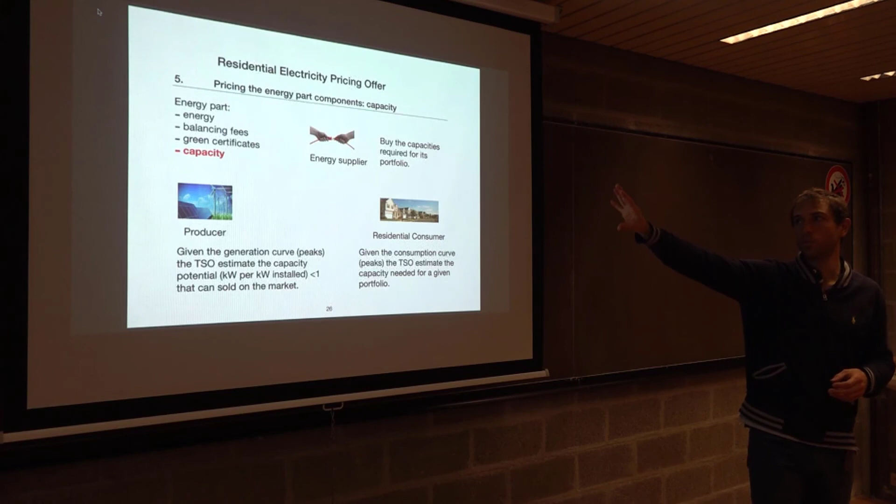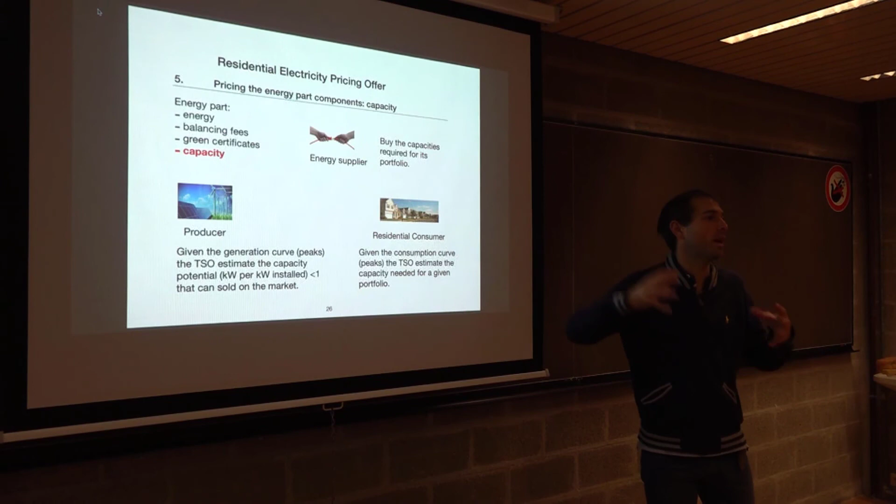So the energy supplier has to pay for that. So you don't know it, but in fact in your electricity bill you pay a certain amount for that, to help the system to be balanced.

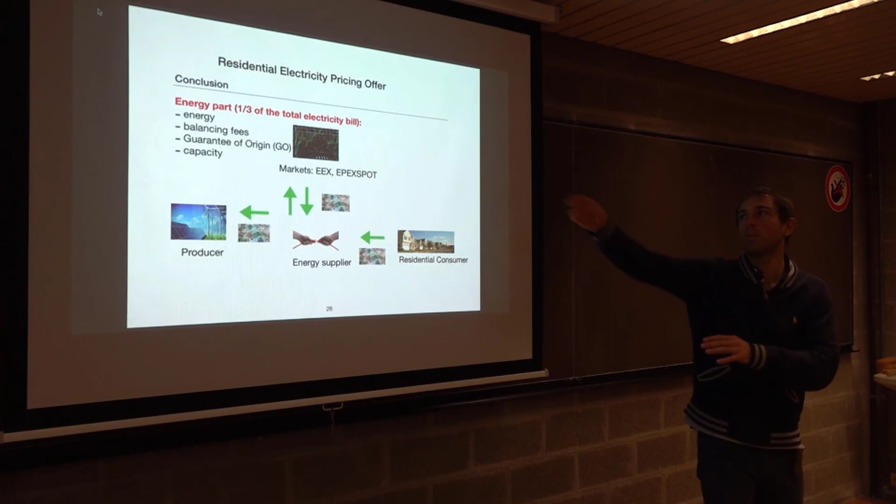Okay, so if I try to sum up everything, what you have to bear in mind is that the energy part of the electricity bill or gas bill is only 1/3 of the total price. So remember, you pay around 25 cents euro per kilowatt of electricity. But the energy, what you pay for energy, is only 1/3 of that, 5-6 cents. And for this 1/3, you have the energy that is 80% of everything. And then you have balancing fee, guarantee of origin, and capacity. And they represent 20% of that 1/3, something like that. But just remember that: when you pay your electricity bill, most of everything goes for taxes, for distribution, transportation. Then you have energy and some additional fees. And the energy supplier is only acting on this part, and he's trying to optimize everything to have the smallest cost here to make a small profit.